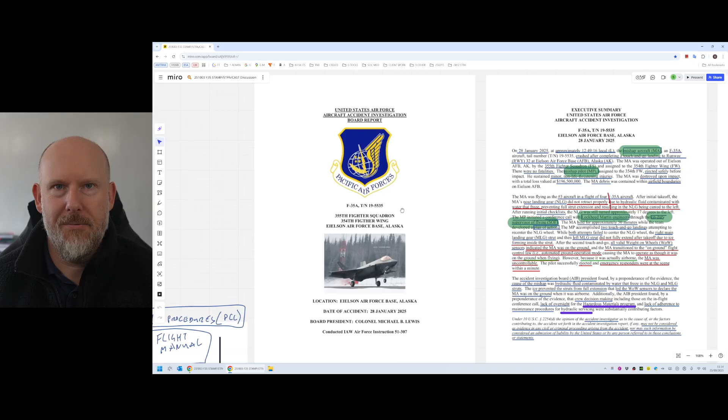In terms of where we got up to yesterday, we started going through the official investigation report, published relatively recently, and we managed to get all the way up to Section 5, maintenance. So what I intend to do for the next hour or so is continue through this investigation report, making notes, annotating things, and addressing any questions as we go. Let's get stuck in - Section 5 maintenance, that's where we got up to.

There we are, maintenance. This shows a crash site overview - I think that should be big enough on your screen. Yeah, it looks like it. Fantastic. So we've got pilot recovery chute there, ejection seat, impact site, taxiway Sierra, and then of course the flight line with all the aircraft over here.

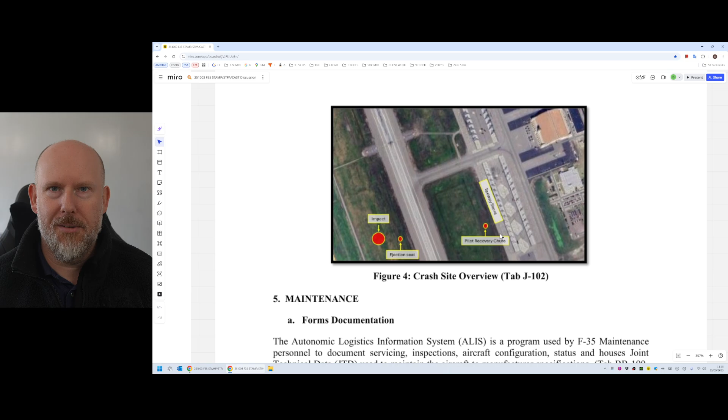That huge cost - $196.5 million. If things had just been slightly different, they could have had more casualties and more damage and destruction. So whilst it lost an aircraft, this was a near miss, a real lucky situation. I think they got off quite light, and it suggests there's some potential serious issues with the control structure, which we'll identify as we go through this.

So maintenance then, Section 5. Forms and documentation - the Autonomic Logistics Information System, here we go. This is interesting - the Autonomic Logistics Information System. That might be a candidate for inclusion in our control structure model, so we'll have to keep our eyes open for that and have a think about it.

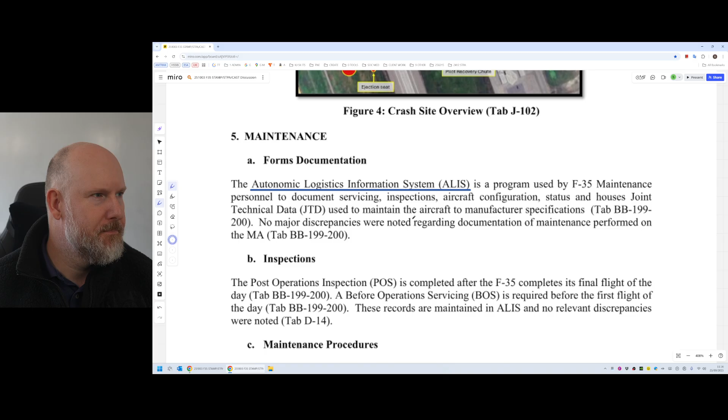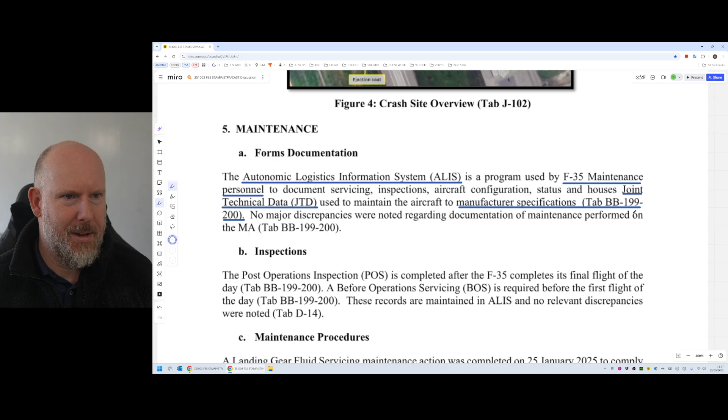Fantastic, thank you. So ALIS is a program used by F35 maintenance personnel to document servicing, inspections, aircraft configuration status, and houses joint technical data. So F35 maintenance personnel will certainly be in our control structure model - used to maintain the aircraft to manufacturer specifications. No major discrepancies were noted regarding documentation of maintenance performed on the mishap aircraft.

Okay, great - inspections. The post-inspection report: post-operation inspection is completed after the F-35 completes its final flight of the day. Before operations service, also AF and BF in traditional speak - before flight and after flight - is required before the first flight of the day. These records are maintained in ALIS and no other relevant discrepancies were noted.

Okay, so I'm just thinking, is it worth me now making that system explicit in the control structure? Or should we keep reading and come back to it? I think that's what we should do.

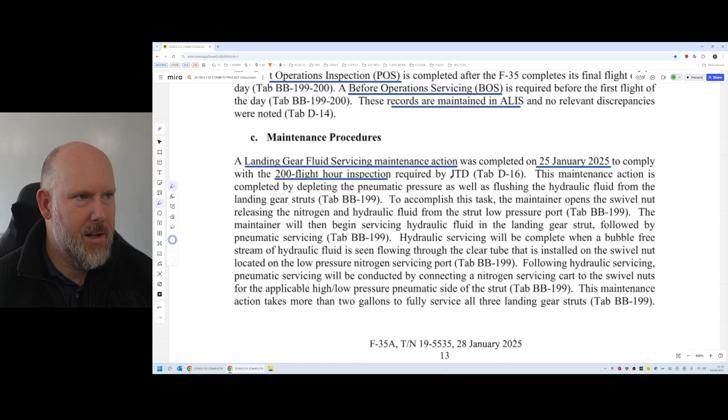So maintenance procedures then. A landing gear fluid servicing maintenance action was completed on the 25th of January 2025 to comply with the 200 flight hour inspection required by the JTD, the Joint Technical Data.

This maintenance action is completed by depleting the pneumatic pressure as well as flushing the hydraulic fluid from the landing gear struts. To accomplish this task, the maintainer opens the swivel nut, releasing the nitrogen and hydraulic fluid from the strut low pressure port. The maintainer will then begin servicing hydraulic fluid in the landing gear strut, followed by pneumatic servicing.

Hydraulic servicing will be complete when a bubble-free stream of hydraulic fluid is seen flowing through the clear tube that is installed on the swivel nut located on the low pressure nitrogen servicing port.

Following hydraulic servicing, pneumatic servicing will be conducted by connecting a nitrogen service cart to the swivel nuts for the applicable high-low pressure pneumatic side of the strut. This maintenance action takes more than 2 gallons to fully service all 3 landing gear struts.

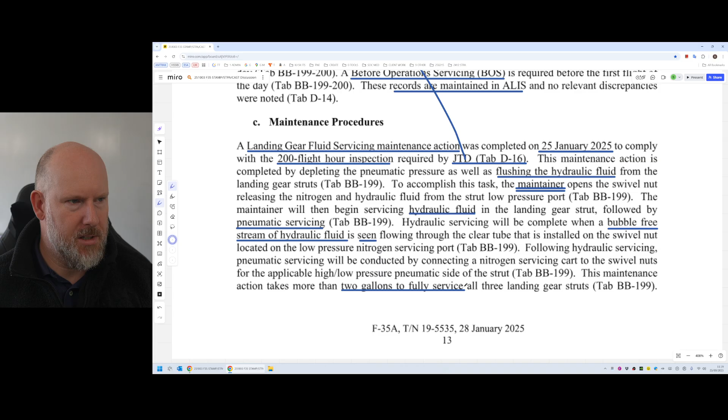Fantastic. 3 days prior to the mishap, so that's some time information that might be relevant. 3 days prior. I can't spell today. There we go. I can't speak, can't spell or write.

Anyway, the maintenance team used no more than 2 gallons of hydraulic fluid to service the aircraft because the team only used 1 hand cart and they did not refill it during the procedure. It was determined that water was already in the struts prior to the servicing because of the amount of hydraulic fluid correctly serviced.

So they used no more than 2 gallons.

Maintenance personnel and supervision, both maintainers - so there were 2 maintainers - assigned to the 355th Fighter...

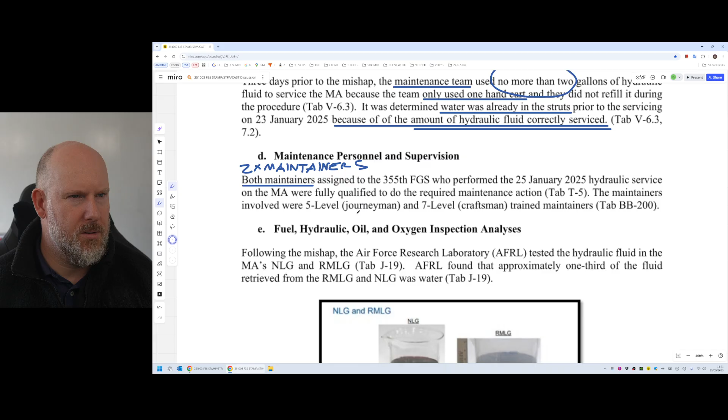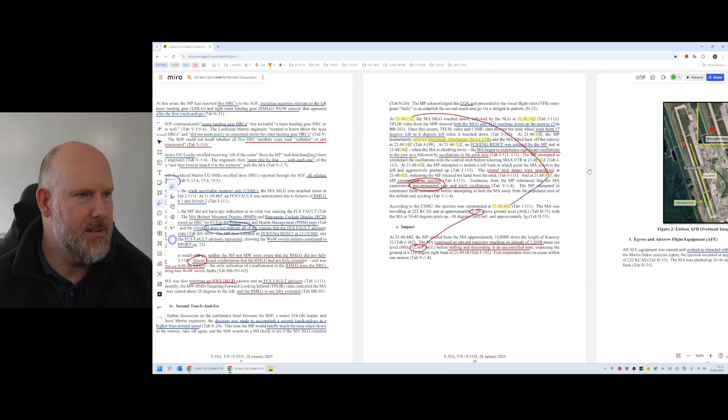What was FGS? Oh, that's the ground squadron, isn't it? The FGS, that's the maintenance ground squadron. Where's FGS in there? Come on, FGS. FGS is missing. Found one. There we go. I think it's mentioned earlier on, isn't it? Let's have a look. It was mentioned earlier on somewhere. Is it mentioned there? No, it's not. So FGS, what the heck is FGS? Flight Ground Squadron, something like... Yeah, it is. No, hang on, that's the one we've just been looking at.

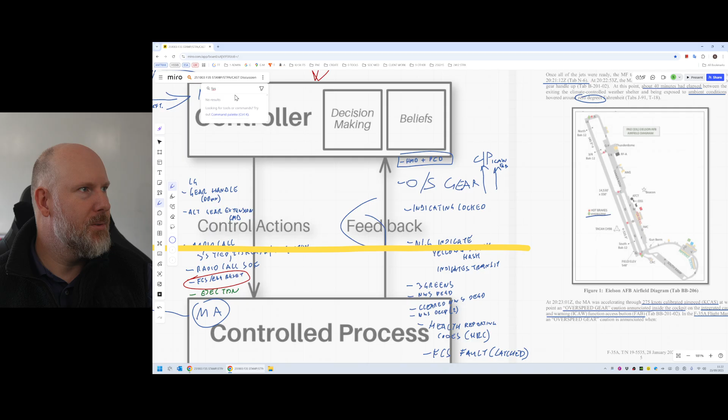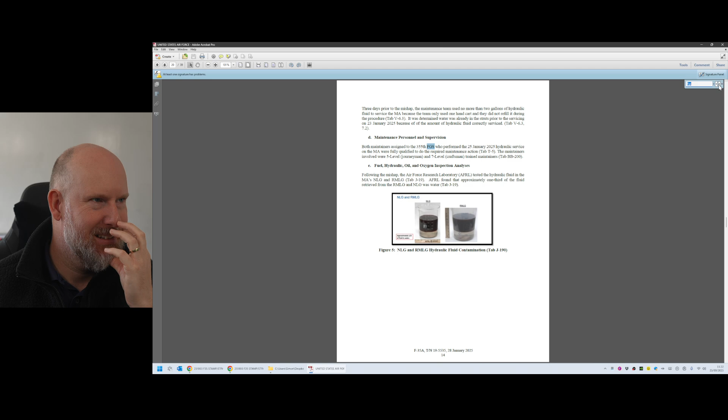So what's FGS then? Anybody know in the chat what Foxtrot Golf Sierra is? FGS, I'm sure we touched on it yesterday. I seem to remember something. FGS, come on. You know what? I could just try the search function, couldn't I? But of course it doesn't work. That's helpful. Right, that's not helpful at all, is it? Let's get the official investigation report open and I'll search for FGS in there. There we go, FGS. Come on, where does it describe what it is? I'm sure it said it. It doesn't say what is FGS? Come on. Is it the ground squadron or something? Ground squad, come on, what is it? Ground, ground, ground, ground, ground, background. This is weird, I could have sworn. That's really strange. Okay, I'm going to have to search on Google. What does USAF FGS, what is it?

Fighter Generation Squadron, apparently. Okay, yeah, which is responsible - you're not seeing this, are you? There you go. So, Fighter Generation Squadron, which is responsible for the inspection, general, and organisational maintenance of specific type of aircraft. Okay, so that's what it is. Right, there we go, fantastic. So now we know what it is.

Let's go back to where we were. Going too fast. There we go, sorry, FGS. So let's paste that in there so we don't forget. FGS. Oh, here we go, Milan. Hi Milan, great to see you mate. FGS sometimes means fuel gas supply or flying ground service. That's thanks for that, that's really helpful. They're different acronyms to what I'm used to. That's what it is, that's my excuse and I'm going to stick to it.

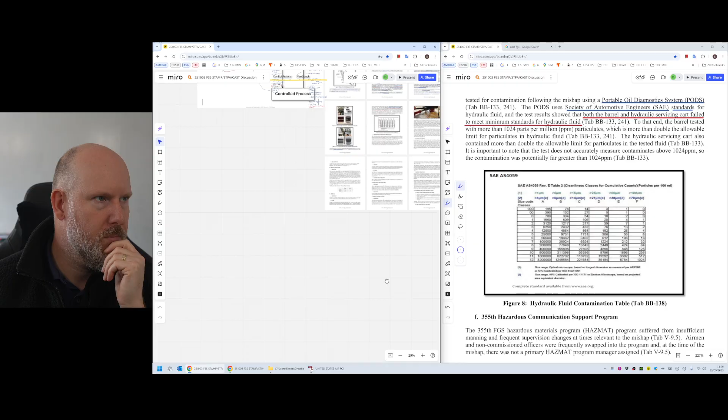So let's just duplicate this. Let's get rid of all the scribbles, if I can remember how to do it. There we go, delete. So that should be nice and clean now. So let's think about it like that then.

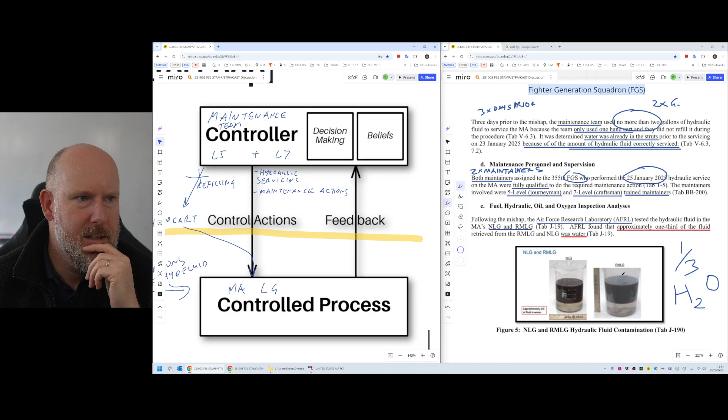So the mishap - they found a third of water in the hydraulic fluid, which is quite incredible. The hydraulics fluid was sourced from a barrel. So if I just move this over here a bit, so you can see, 2 gallons of hydraulic fluid that came from some barrels, a barrel.

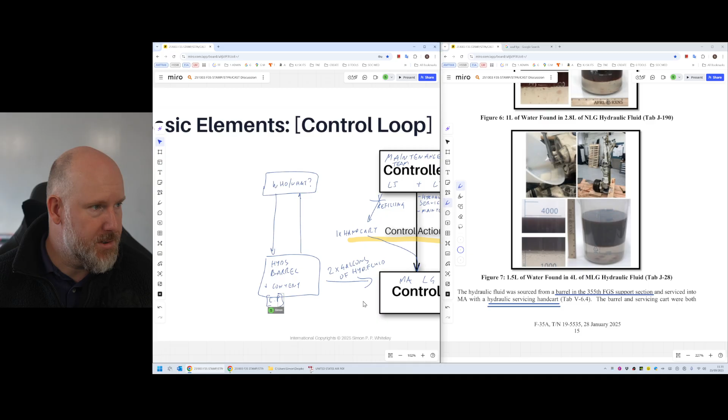I'm drawing a box around it, not because it's a controller, but because it's a control process for somebody. So who or what is in control of that hydraulics barrel and the content? That is a controlled process, that's what CP means. Let me zoom in a bit so you can see it. So who or what is involved in that hydraulics barrel and the content of it?

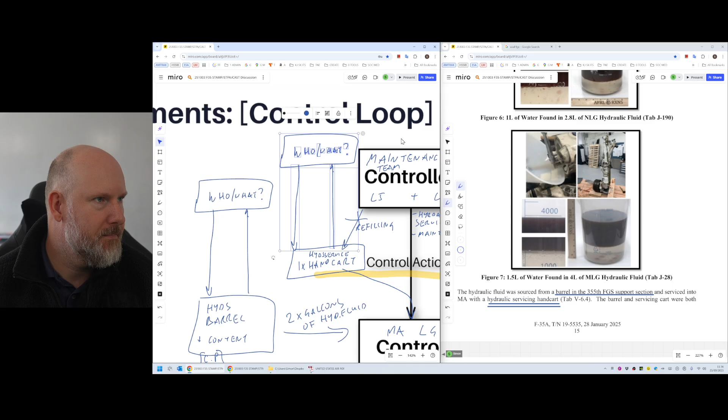It mentions there that they use the hydraulic servicing cart, so I'm presuming that's what this is here, the hand cart. So let's label it: hydraulic servicing hand cart. Let's make that into a controller, and let's steal that bit, duplicate it. So who or what is involved in looking after the hydraulic hand cart? There you go - so we've got potentially 3 control loops there to consider as part of our analysis.

The barrel and the servicing cart were both tested for contamination following the mishap using the PODS. The PODS uses standards for hydraulic fluid, and the test showed that both the barrel and the servicing cart failed to meet minimum standards for hydraulic fluid. So both of these - oh no, not that one, this one - both of these are not in a good state.

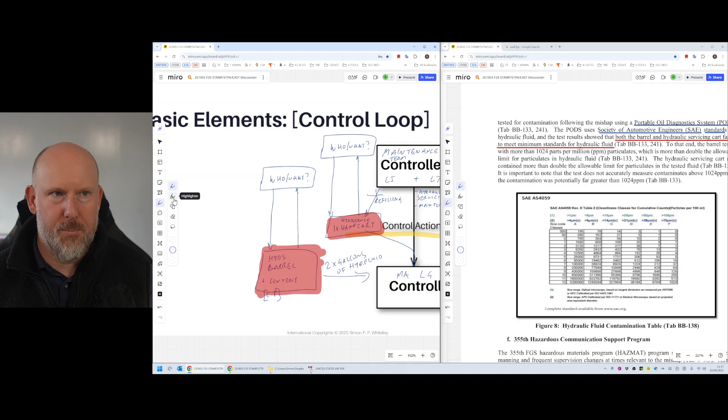And I'm just busy colouring in. There we go, I should have used boxes instead of drawing it. But yeah, so we know that those 2 control processes, there's something not right with those. So the exploration of the investigation should essentially be: let's have a look at these control actions here and here. So why were they inadequate in making sure that the hydraulic fluid was not contaminated? Because that's really what we're focusing on here - the contamination of the fluid. To that end, the barrel tested with more than 1,024 parts per million particulates.

Why is it not - oh, it's because I've got two screens open at once, that's why, I'm trying to be too smart, that's what's going on. Anyway, which is more than double the allowable limit for particulates in hydraulic fluid. The hydraulic servicing cart also contained more than double the allowable limit in the tested fluid. It's important to note that the test does not accurately measure contaminants above 1,024 parts per million, so the contamination was potentially far greater than 1,024.

Okay, so that's not good, that's not good at all. So let's explore this use of PODS that we're talking about here.

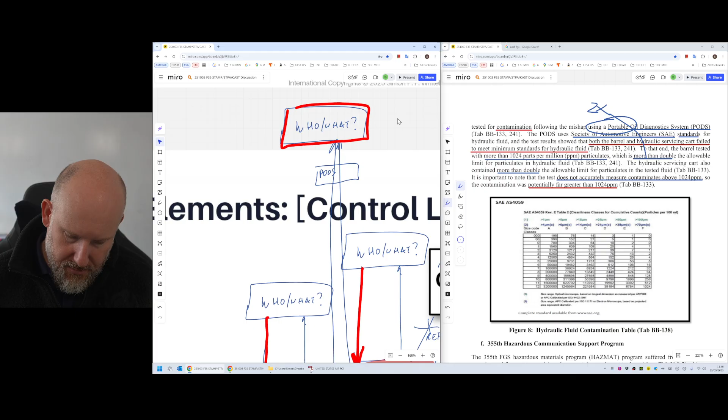So this one here and this one here, the start cart - is that responsibility, that explicit responsibility, actually allocated to whoever these are? I don't know who they are at this stage. And are they even the same controller? They could be the same controller. We don't know that at this stage.

But that's what I'm trying to show you here - by thinking about things through the lens of control loops, jigsaw pieces, it allows you to think, oh, actually, we've got this physical situation or we've got this control action. Who or what is involved in that control structure? And this is not about trying to find people to blame. It's trying to understand, uncover, what are the jigsaw pieces? What is the jigsaw puzzle that we're actually involved in, in this particular situation?

And so if we were able to interview these two, whoever those people are - presuming it's not AI and anything crazy like that - who are those people? Are they the same people? What are their responsibilities? If they provided the control actions or didn't collect the feedback, why did it make sense? What's going on there? So I'm jumping ahead a little bit there, but I hope that makes sense, the logic behind the thought process.

Okay, so going back to this, it's potentially more than 1024. Okay, that's some hydraulic fluid contamination table. Yeah, okay, I'm not really too fussed about the specifics of that.

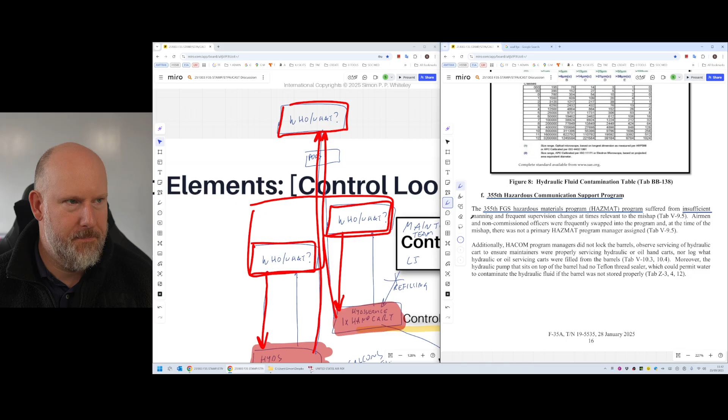355th Hazardous Communication Support Program. Okay, so that might be a controller of some description. The 355th Hazardous Materials Program, so HAZMAT program, suffered from insufficient manning. Oh, here we go. Insufficient manning and frequent supervision changes at times relevant to the mishap.

Okay, so I'm presuming then that this red box I've drawn, this is what they would call the hazardous materials program, I'm assuming. And this is one of the advantages with CAST - when you identify a candidate controller, the first question... in fact, I'll just zoom out and show you. The first question is, for this particular controller, what are their safety-related roles and responsibilities and safety requirements constraints?

If it is making sure that the hydraulic fluid is below a certain limit of contamination, then who has that responsibility? Why was it not fulfilled? And if, as this says here, there were frequent insufficient manning levels and frequent supervision changes, that would explain why it's not been done.

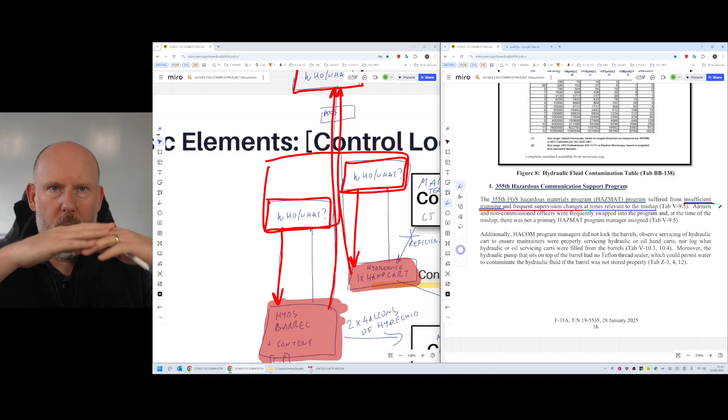But who's responsible for making sure - who is the person who decides on manning levels, or what department, and then who decides about supervision changes? Who is that layer above these ones? There's another layer there. Who's involved in that? Why did it make sense for them to make those decisions?

Because there may be some genuine... we're not here to point fingers and blame people, or question people's competence. It's not about that. It's about understanding what are the facts, whether it's related to competency or not. What was the decision making? What were the beliefs? Why did it make sense?

So airmen and non-commissioned officers were frequently swapped into the program, and at the time of the mishap, there was not a primary program manager assigned. Okay, there we go. That's interesting.

So let's stretch this around a bit. Let's move this down a bit like that. So we've got a question there about... let's steal that bit there, not that, duplicate, let's put it over there. Let's get rid of all of that and the red bits. There we go. So there's a question there over who or what. And maybe I'll stretch it a bit more. There we go, put it down there. Okay, so who or what?

So we've got the... you know what I might do? I might use a box. Where is it? There we go. Might make it look pretty if I do it like this. So the 355th Hazardous Comms Support Program should have a program manager, so let's put that there, but there wasn't one.

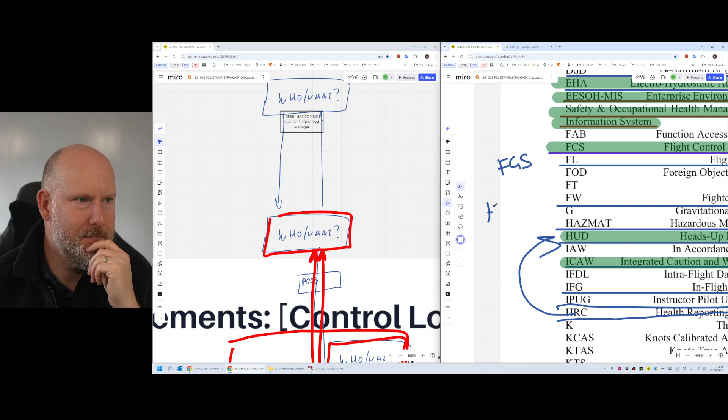Okay. Additionally, HACOM... oh, hazardous communication, I'm assuming. Let's just have a look at the acronym list. HACOM, HHH, missing. There we go. HACOM. It needs to go in there somewhere, and that needs to go in there somewhere. Okay, where were we? There we go.

Program managers did not lock the barrels. Okay, so if we're talking about the barrels down here, that particular single line there - did not lock the barrels. That's related to this control action here. And then we've got... so that's a potential contributory control action, if we want to get technical.

Observe servicing of hydraulic cart to ensure maintainers were properly servicing hydraulic or oil hand carts, nor log. So they did not observe servicing, so that's another contributory control action.

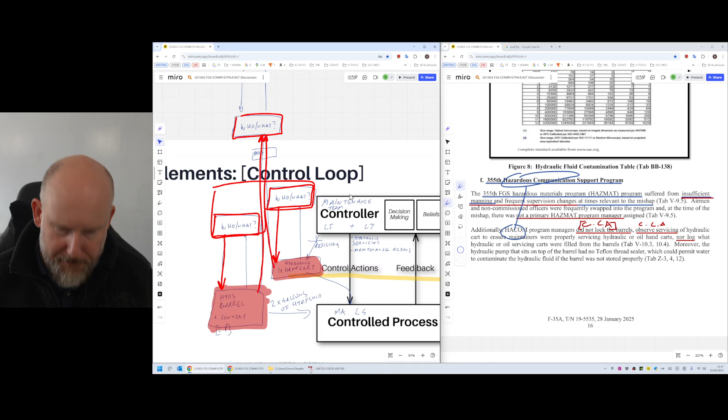And I suppose that's actually related to, let me use my pen over here. That's probably a feedback path. Why is my pen not working? Come on.

Yeah, you can see my screen, so let's just move that there. So there's a potential missing feedback loop from there or there. It's not really clear from the description, but that's about observing the servicing of the hydraulic cart. Oh, right, okay, so that could be this control action here, or it could be another, or it could be this one we've already highlighted here like that.

Could be that one that this is referring to. And there wasn't a log of what hydraulic or oil servicing carts were filled from what barrels. So there was no log. So in terms of, if you imagine the, let's have a look, let's choose a different colour.

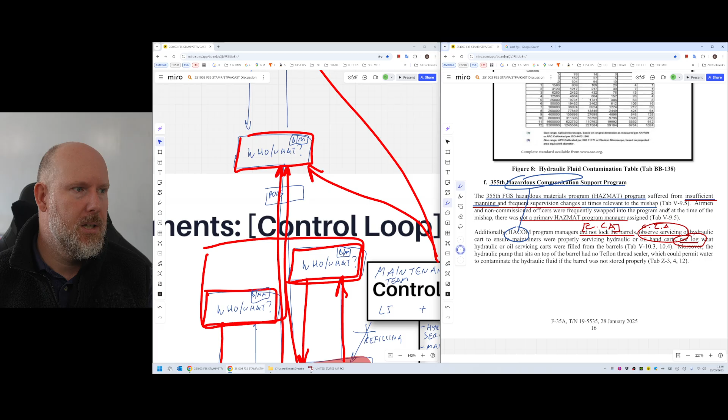If you imagine the beliefs or mental model of these people, whoever they are, or whoever this person might be, beliefs, mental models, the log, whilst the log is not a controller itself, it is a representation of the process model, which is a representation of the state of, I'm going to make it even, yeah, it's a representation of the state of these two. So if there's no log, then how do these individuals or how does the organisation know and be able to manage and maintain and control that controlled process?

Well, they can't, as we're sort of alluding to here. So I'm just going to quickly add that up here. So what's it called? It's called a log. So let's just make that explicit, because the log is important. It is really, it's not just paperwork, everybody. These, you know, yes, it's paperwork or digital, but it is critical information.

And this is one of the questions. In fact, this is a good topic to talk about. So I mentioned yesterday, I'm doing some work on electronic prescribing medicine administration investigation. And there's always a question about whether it's a medical device or not. And in the UK, in Europe, there are regulations on how to classify medical devices. You know, certain functions mean it's definitely a medical device. And if it is, it has to be managed in a certain way, and if it's not managed in that more robust fashion.

But the question is not whether it's a medical device or not in that context. It is, what purpose does that record, the log in this case, what purpose does it serve in a control structure? And if it's not provided, it's lost or denied, or if it's too late, or it's provided out of sequence, or it's not consulted, does that have an impact on the overall control structure? Does that influence, perhaps dangerously, the behaviour of certain controllers?

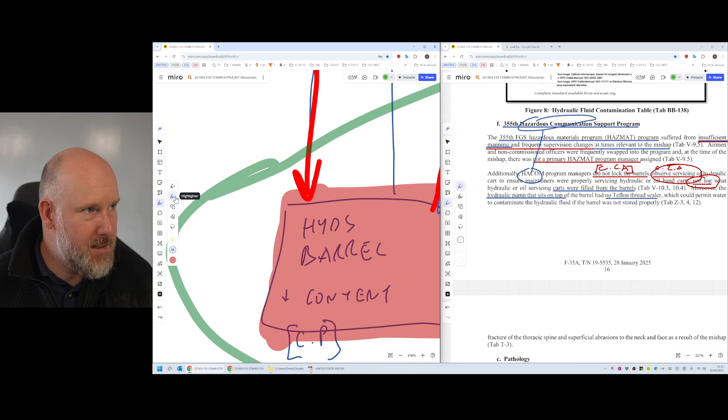Moreover, the hydraulic pump that sits on top of the barrel had no Teflon thread sealer. So this is about the physical process here, and how, sorry, let me use my pen over here. There we go. So if this is the hydraulics barrel in the content, and you have a process to refill it, using, what's it called, using a hydraulic pump.

Okay, and that has no Teflon thread sealer, which could permit water to contaminate the hydraulic fluid if the barrel was not stored properly.

So this is where we'd focus from a physical process perspective. Well, was it supposed to have a Teflon thread sealer? If not, why not? What's the controller involved in that? Is it a design issue? Is it a maintenance issue? Is it a build issue? Did it come from the factory with this part missing? So is it a manufacturer issue? Is it a maintenance issue?

And then, of course, water getting in to contaminate the hydraulic fluid if the barrel was not stored properly. Okay, so again, that goes back to this controller. Who or what is involved in maintaining and storing the barrels? What decision making did they make? Was there a conscious decision to store it in a particular place which was not stored properly, whatever stored properly means? Do they know what criteria they need for proper storage? Because if they don't, that might explain it.

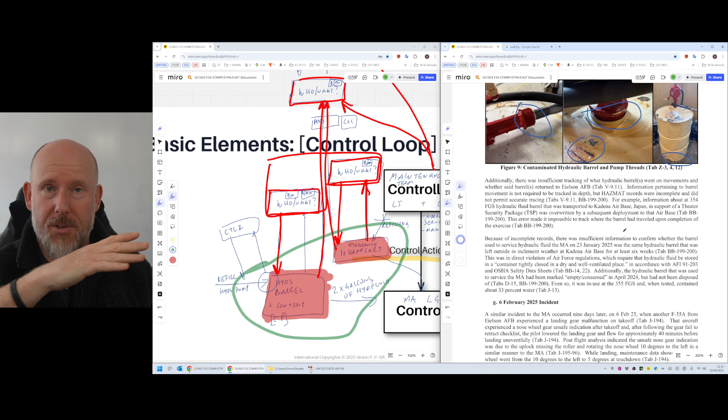There we go. Maybe they didn't have any. Maybe they didn't have any in stock because there's an issue with the supply chain for those things. And if that's the case, what does the supply chain control structure look like for that seal? I'm going a bit crazy here, I'm just trying to stretch your mind a bit.

Additionally, there was insufficient tracking of what hydraulic barrels went on movements and whether said barrels returned to Eielson. So there's a tracking aspect. So let's have a look.

Come on, wake up. That's it. So I put a log over here, look at the top, and there is an equivalent log needed for the barrels themselves. So status of the barrels, and then status of the maintenance and content of the handcart and the barrels themselves. And those two logs, this one up here and this one down here, they could be part of the same logging system, maybe. I don't know, I'm guessing. That might affect the way I model the control structure.

Because there was that mention of that ALIS thing earlier on. Let's have a look, where is it? ALIS, where are you? There we go, ALIS. So is ALIS relevant to this? Is that the log that they're supposed to use? Is that the log that's supposed to track and manage the... so it's about servicing, inspections, aircraft configuration, statuses.

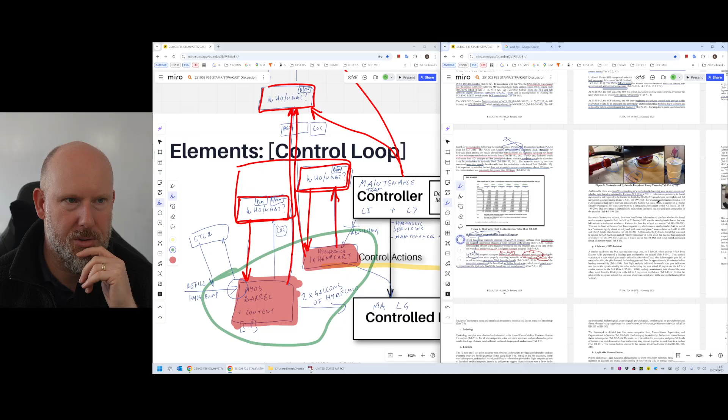Anyway, information pertaining to barrel movement is not required to be tracked in depth, but hazmat records were incomplete and did not permit accurate tracing. For example, information about the 354 FGS hydraulic fluid barrel that was transported to Kadena in support of a theatre security package was overwritten by a subsequent deployment to that airbase. This error made it impossible to track where the barrel had travelled upon completion of the exercise.

Okay. Yeah, okay, that's interesting. Because of incomplete records, there was insufficient information to confirm whether the barrel used to service hydraulic fluid on the 23rd of January was the same barrel that was left outside in inclement weather. Ah, okay.

For at least 6 weeks this was in direct violation of it. So, because of incomplete records, there was insufficient information to confirm whether the barrel used to service hydraulic fluid was the same hydraulic barrel that was left outside in inclement weather.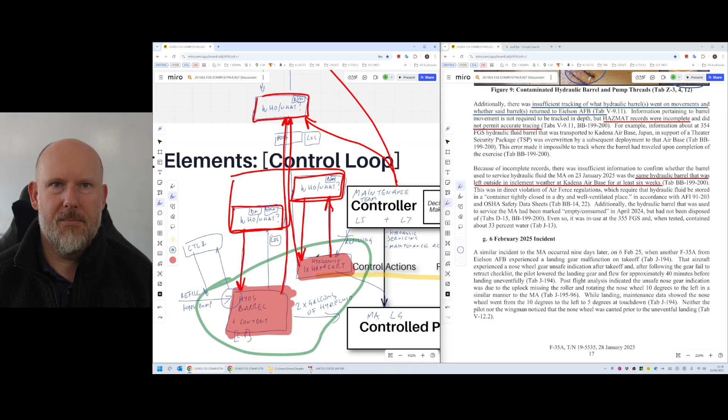In terms of this control structure, I was thinking it was constrained to Eielson Air Force Base. But what this is describing is actually this barrel was under the control of somebody else in a completely different country, in Japan. So that's interesting.

This was in direct violation of Air Force regulations, which would be higher up in the control structure. I'll just scribble those on there to add a bit of detail. Bear with me a second. Air Force regulations. So the question is, how does that get down to the person filling the barrels, or to the persons involved in maintaining them, looking after those barrels, moving them around, and the logistics, which require the hydraulic fluid to be stored in a container.

So the fluid is to be stored in a container, tightly closed, in a dry and well ventilated place, because it's quite nasty stuff. You don't want to be breathing it in, in accordance with AFI 91203 and OSHA safety data sheets.

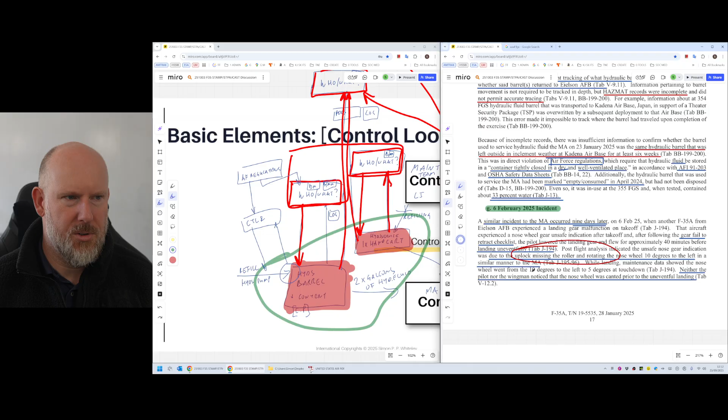So the question is, is it that 5 degrees is survivable and doesn't flip the aircraft upside down? And if it had stuck at 10 degrees, would it have flipped the aircraft upside down, but the pilot would not have realised? These are things you wouldn't expect the pilot and wingman to be checking - the gear after takeoff before retracting it, and then making sure it's clear after retraction every time. But then I'm not a fighter jet pilot, so they may do a lot more checks than I anticipate.

It's an aircraft, it's not a car, Simon, you know. There's a lot of things that you'd have to check that you wouldn't do on a car.

Anyway, a post-flight test was done on this aircraft by first towing it into a climate-controlled shelter. What's 70 degrees? 70 degrees American into English, so 21. So it's quite a warm 21 degrees, quite balmy, t-shirt weather.

And recording the nitrogen pressures on the landing gear shock struts, the aircraft was then towed outside where temperatures remained below 15. So 15 is -9, so that's still cold. Still cold.

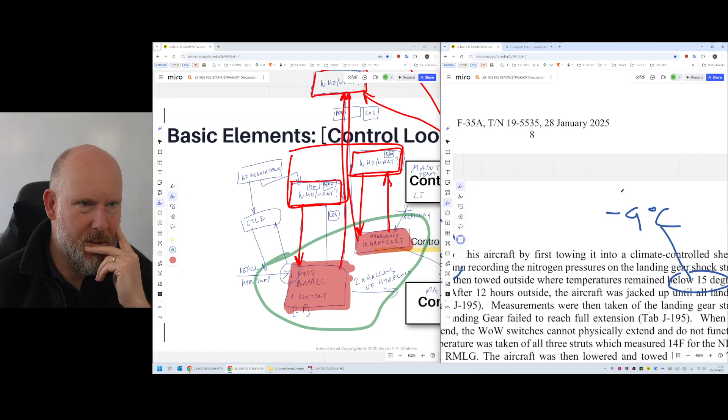But not as cold as the previous accident. I can't remember what that was. That was like -7 or 11 or something. Where is it? Where's the temperature? I'm sure I scribbled it down. There it is. No, yeah, there we go, -17. So it's -17. So it was not as cold as the previous one.

After 12 hours outside, the aircraft was jacked up until all landing gear cleared the ground. Measures were then taken of the landing gear struts.

The aircraft's landing gear failed to reach full extension when the main landing gear struts failed to fully extend. The WOW switches cannot physically extend and do not function properly. Oh dear. Temperature was taken of all three struts, which measured 14 degrees.

7 degrees to the left main, the right main. The aircraft - oh, that's interesting. So the main gears were warmer than the nose landing gear.

The aircraft was then lowered and towed back into the 70 degree climate-controlled hangar, and sat for 12 hours. All three landing gear struts were then drained of all fluid into mason jars. The nose landing gear and left main landing gear had a significant amount of water present, while the right main landing gear appeared to be all hydraulic fluid.

So for this particular aircraft, does it give a tail number? Yeah, it doesn't say which other aircraft it was. So it's obviously a different aircraft because the first one's been smashed up.

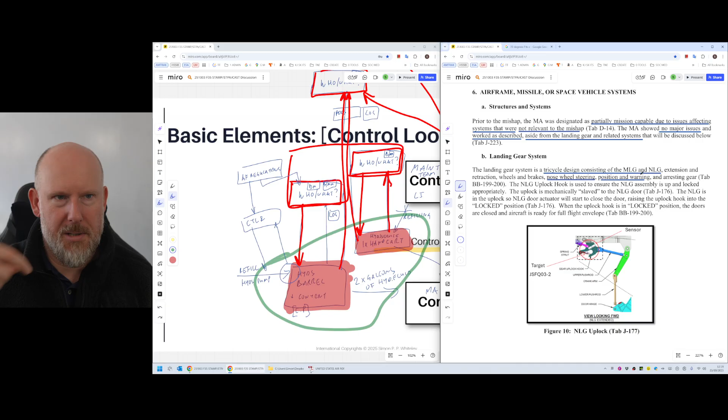So the landing gear system is a tricycle design consisting of the main landing gear and the nose landing gear, extension and retraction, wheels and brakes, nose wheel steering, position and warning, and arresting gear. So that's a hook typically at the back. The nose landing gear up-lock hook is used to ensure the landing gear assembly is up and locked appropriately.

The up-lock is mechanically slaved to the nose landing gear door. When the nose landing gear is in the up-lock, the nose landing gear door actuator will start to close the door, raising the up-lock hook into the locked position. When the up-lock hook is in locked position, the doors are closed and the aircraft is ready for full flight envelope.

Oh, sensor, there we go, that's important. And then the target for the sensor. Spring strut, gear up-lock hook, upper push rod, crank arm, lower push rod, door hinge.

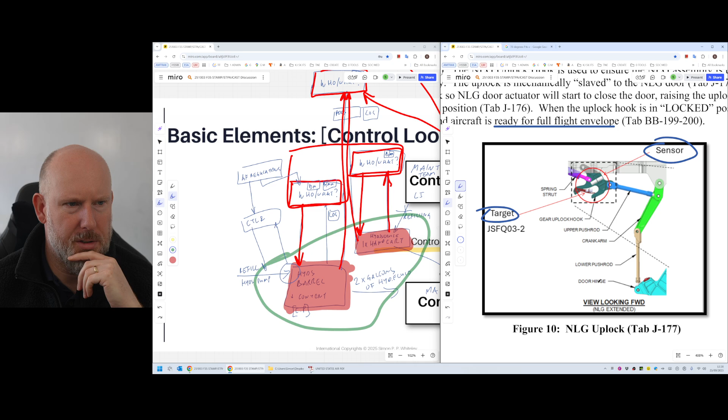Fantastic. Okay, what's this one then? So this is the nose landing gear lower shock strut. We've got lower centering cam, possible ice build-up in the area, upper centering cam, upper shock strut. The nose landing gear centering cams are used to ensure proper centering of the nose landing gear.

One of the cams is mounted at the top of the landing gear strut and the other is mounted at the bottom. At the beginning of the mishap flight, the nose landing gear didn't fully extend due to ice build-up within the strut. The ice build-up was the combination of significant water contamination in hydraulic fluid used to service the struts and ambient freezing condition temperatures around Eielson. The lack of full extension caused a misalignment that prevented the nose landing gear up-lock hook from catching the nose landing gear up-lock roller, causing damage to the metal adjacent to the roller.

Ah, okay, there we go, look. So we've got some damage. Okay. Additionally, significant pitting was identified within the landing gear piston that, while caused by contamination to the hydraulic fluid, did not affect the landing gear function. Okay, so that's interesting.

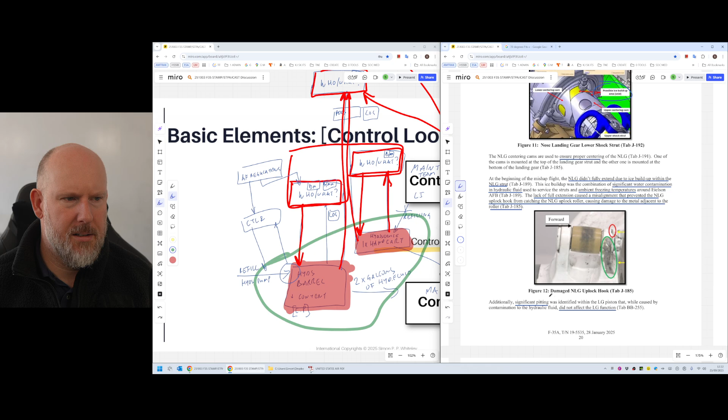In terms of servicing, so this is—I just move this over here. In terms of feedback there, you've got the pitting within the piston.

So I'm presuming that the maintenance or servicing procedure will look for those signs, because if it's left to get worse, you'll end up with potential cracks and perhaps pressure release or breakup of the piston itself, which would be bad. I'd imagine that takes a while to happen, so there might be a dormancy period. I'm assuming that. I'm sure there's people out there that know everything about landing gear and have done the failure modes and effects analysis for these components, and understand the physics of failure associated with ice and water contamination.

Okay, so some nice pictures. We've got the nose landing gear, the main landing gear, and the WOW sensors, weight on wheel sensors.

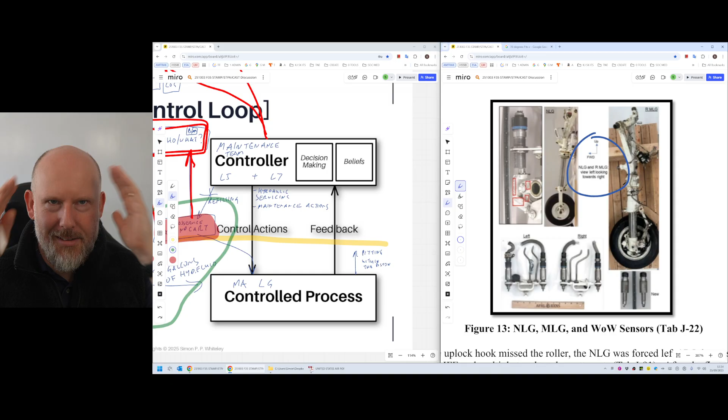I'm impressed with this. One of the things I really like, you can tell that whoever's been involved in the investigation has got a real good sense of attention to detail and also a healthy respect for the audience when they include descriptions like that to help you visualize in your mind, tell a story about what you're actually looking at. I really appreciate that, whoever wrote the report. Thank you.

After the nose landing gear uplock hook missed the roller, the nose landing gear was forced left 17.5 degrees, leading to the in-flight emergency and multiple touch and go attempts. After the first touch and go, the right main landing gear and nose landing gear WOW sensors showed weight on wheels, despite the aircraft being airborne. This was because the aforementioned ice buildup prevented the struts from fully extending or retracting. On the last touch and go, the nose landing gear wheel went from 17.5 degrees to 6 degrees after it was allowed to briefly touch the runway.

So just quickly, just to emphasize this previous accident that occurred. This one here, similar accident. So they said that it went down to 5 degrees at touchdown, whereas this one was at 6 degrees at touchdown.

Is that suggesting, and please entertain the idea, is that suggesting that with the accident aircraft, the mishap aircraft, if they'd have tried to land with 6 degrees after this touch and go, the aircraft might have survived, because we've got circumstantial evidence here that this other aircraft landed with 5 degrees at touchdown. So maybe 6 degrees, maybe they get away with it. I don't know how hairy 5 degrees was. But of course, that's an academic question because, after the aircraft took off again with 6 degrees, we ended up in an uncontrolled situation. So, yeah, a bit of an academic question now, I think.

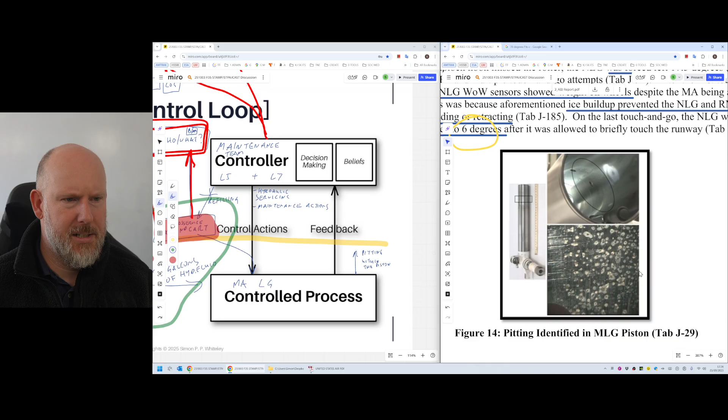Pitting identified... Oh, that looks quite bad, actually. That looks quite bad. Pitting identified in main landing gear position, piston, should I say. As discussed below, the inability of the strut to fully extend and retract impacted the proper functioning of the WOW sensors and the flight control law on the mishap aircraft. According to Lockheed Martin, if a main landing gear strut fails to fully extend to the predetermined length, then the WOW sensors cannot extend and will report weight on wheels.

So in terms of thinking about the control loop, I'll just quickly jump back to this one here. So have we put WOW sensors on there? No, we've not, because this is the pilot and this is the aircraft. Okay, so this yellow line just represents the abstraction between the aircraft as a controlled process and the pilot.

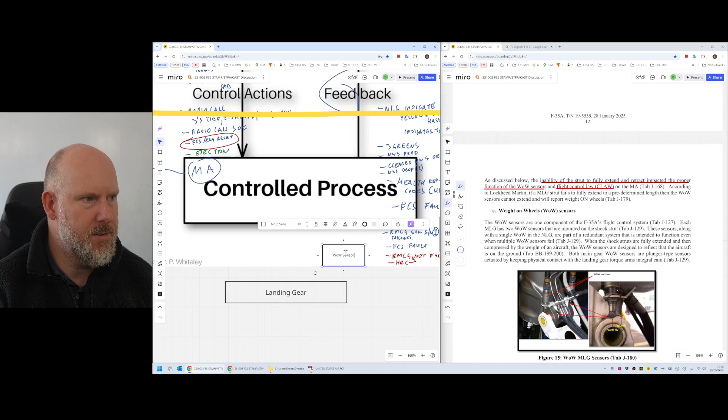What I might elect to do is add, let's stick another controller in here. Let's have landing gear. I can't spell. Landing gear. Excuse me, there we go. And then let's make that text a bit bigger. There we go, make the box a bit bigger. That's it. And then, oh no, I didn't mean to do that. And then this can be the WOW sensors. WOW sensors. So that box represents sensors. That doesn't represent a controller, that represents sensors. Just to emphasize that point.

And of course, we want an arrow, so let's get an arrow that goes from there to there. Let's make it a straight one. There we go. Oh, no, I didn't mean to do that. There we go. So we've got WOW sensors. So the WOW sensors provide feedback to, in fact, actually, let's just do this as well. So the aircraft controls its landing gear to command it up and down. The WOW sensors provide information back to the aircraft, and the aircraft decides what state it's in.

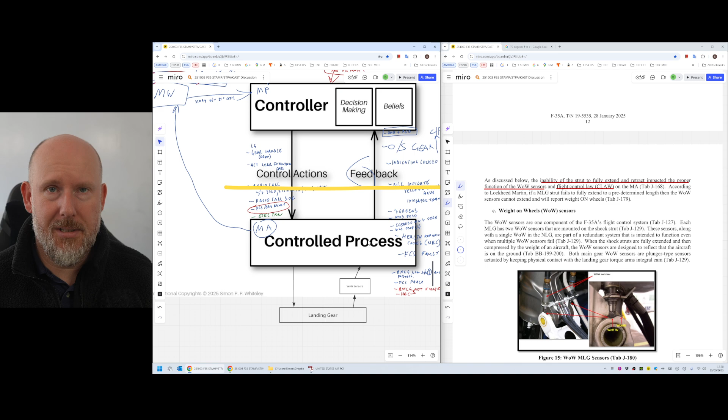So let's have a look at this then. Yeah, that's a really important point just there.

There we go, I'm just going to grab a drink. Just bear with me a second.

There we are, back again. Right, so the weight on wheels sensors. Let me just zoom in on there so you can see it a bit better.

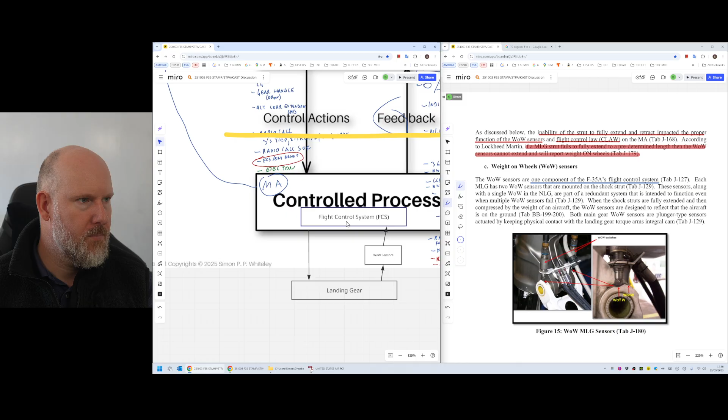So the weight on wheels sensors are one component of the F35's flight control system. What I'm going to do is make a box that says flight control system, FCS presumably, and that goes into the FCS. I'll just move it down a bit. There we go, hope that makes sense.

Each main landing gear has 2 wow sensors. So if I want to get exciting, I could put MLG wow sensor times 2, and each - so left and right, times 2. There we go, so there's 4. And then what else is there?

They're mounted on the shock strut. And then these sensors, along with a single wow for the nose landing gear - nose landing gear wow sensor times 1. So we've got 5 sensors. If you've got a fault tree analysis, it's going to look fantastic because you've got 5 sensors, everybody.

So 2 wow sensors and a single wow are part of a redundant system, everybody. It's redundant - intended to function even when multiple sensors fail. But we're not talking about sensor failures here, are we? Or are we?

Good question. When the shock struts are fully extended and then compressed by the weight of the aircraft, the wow sensors are designed to reflect that the aircraft is on the ground. Both main gear wow sensors are plunger type sensors, actuated by keeping physical contact with the landing gear torque arm's integral cam. So let's have a look at this.

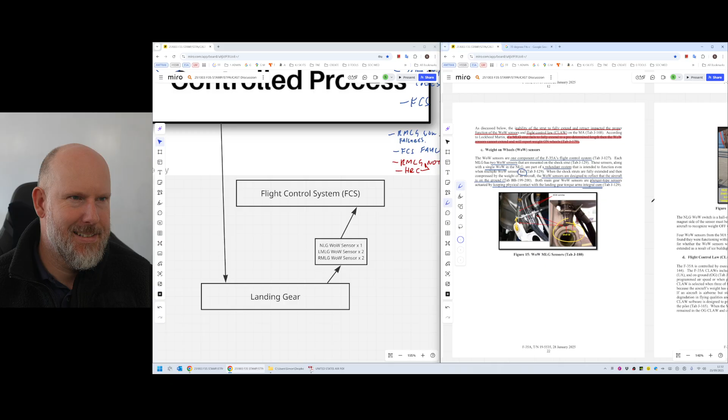Interesting. I wonder if this aircraft's got a radar altimeter or accelerometers. Anyway, I'm guessing on the aircraft design - I shouldn't be.

So weight on wheels at the nose landing gear, switch, Hall effect - oh, it's a Hall effect sensor. Fantastic, everyone loves a Hall effect sensor. Is not aligned, weight on wheels.

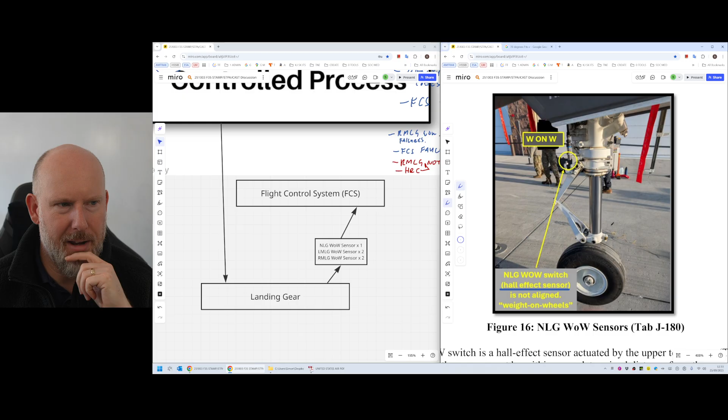So this is a diverse type of sensor compared to the other ones. And if I remember correctly, they're not that reliable. I could be wrong - correct me in the comments if you know about Hall effect sensors.

In fact, let me just - no, I don't need to add that detail. I don't need that level of detail, do I? No, I'll leave it. The nose landing gear switch - it's a Hall effect sensor actuated by the upper torque arm.

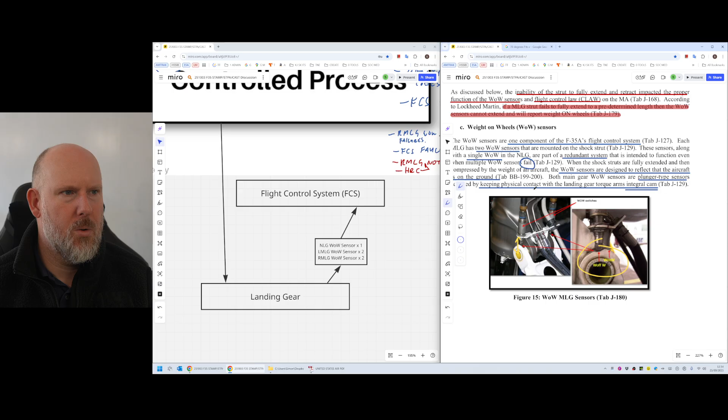The magnet side of the sensor must be within a predetermined distance from the sensor for the aircraft to recognize weight off wheels. So I'm presuming this is weight on wheels because it's compressed, whereas this one is weight off wheels. So this is off and this is on.

Weight on wheels, and then this one is weight off wheels. You might be thinking, Simon, why is that relevant? Well, it is a different functional logic.

If you've got a sensor that's designed to provide feedback about weight being on wheels, and you have a different diverse sensor to signify weight off wheels, the way those two bits of logic actually find their way into the control system is really important.

What's the word? It's not geometry - there's another word, I can't think what it is - but essentially you need to make sure that logically the people involved in the aircraft design, or the design of this system, and the way they do the safety assessment - we're all humans, we're all prone to making mistakes and misunderstanding or misbelieving things and acting in ways that are not appropriate. We're all humans, part of the design process.

Something as simple as the logic between off and on - that logic must be translated into the analysis, into the design, into the requirement spec. It must come out the other side and influence the way we do verification and validation and testing, and then even down to the design of the way they build the thing and maintain the thing, and how they do validation tests, verification tests, once the thing has been maintained.

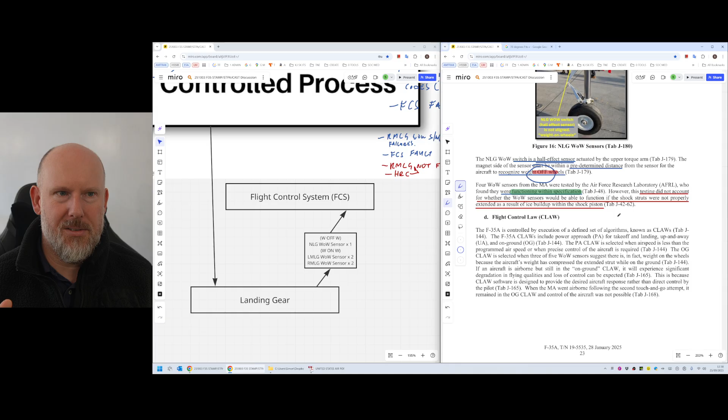But of course, this is the same for every aircraft, all aircraft, anything with landing gear struts like this one and that arrangement of sensors. Anyway, I'm digressing there. Let's have a quick drink.

Now let's talk about the flight control law, or the CLAW. The F-35A is controlled by execution of a defined set of algorithms known as CLAWs.

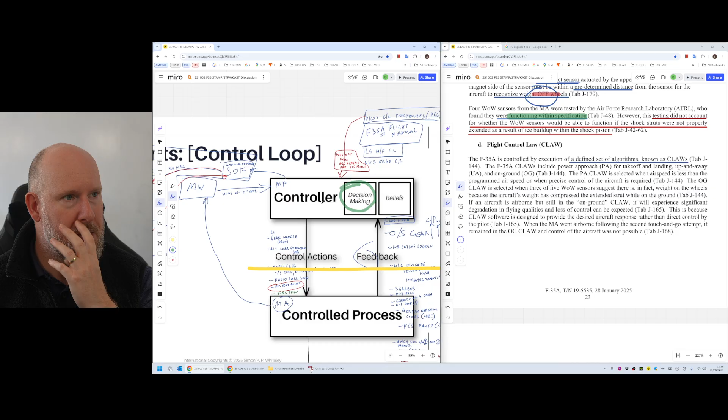So if we look back at our picture, whilst this shows decision making - if you're familiar with the STAMP literature, this represents the control algorithms, the decision making for that controller. So if we're talking about the flight control system, the CLAWs are effectively the decision making control algorithms for this particular controller. So this is the CLAWs. Let's make that box a bit smaller, make the text a bit smaller. Let's make this box a bit bigger, put the writing over there. That's fine.

So we've got flight control system: decision making, control algorithm - CLAWs - and logically we also have what's called the process model, or beliefs process model. I put a B there to remind you it's beliefs, and a DM there to remind you it's control decision making, and then control algorithms, process model, beliefs. So the sensory feedback logically goes into updating the process model for the flight control system - essentially telling it, hey, we're still on the ground, or we are on the ground, so behave accordingly. Then it's up to the control algorithm, the decision making of the flight control system, to decide what to do with that information.

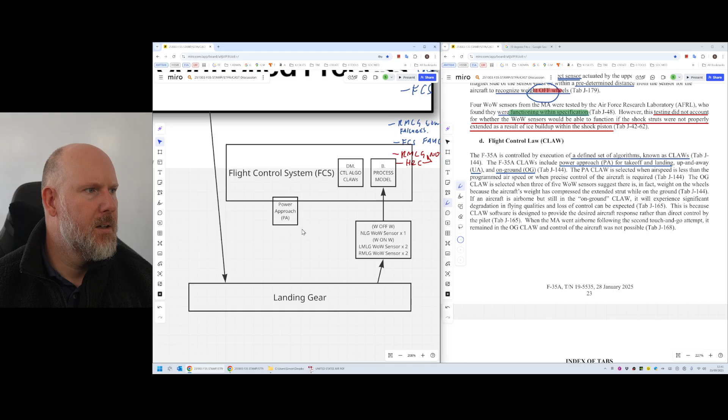So the F-35A CLAWs include power approach for takeoff and landing, up and away, and on ground - so there's three. Let's make that: power approach, I'll use an acronym, PA. What's the other one - up and away, which was UA. Can't spell, there we go. And the third one was on ground, OG. So that's three different control algorithms that we're talking about there.

So that's what they are there. I'm just going to leave them there. I'll tidy it up later on. I don't want to spend too much time doing that now.

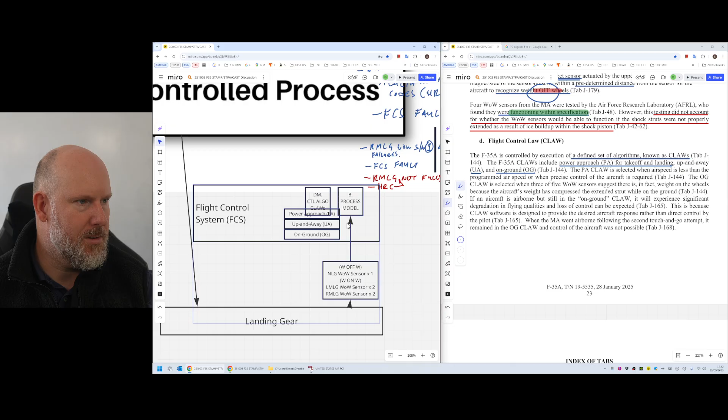Okay, so the PA claw, the power approach claw, is selected when airspeed is less than the programmed airspeed or when precise control of the aircraft is required. The OG, on-ground claw, is selected when 3 of 5 wow sensors suggest there is in fact weight on wheels, because the aircraft's weight has compressed the extended strut while on the ground. So that bit there is really important.

So we've got, out of this logic, use my pen, there we go. Is it that one? Yeah, this one. Let's just zoom in. So we've got, let's use red this time.

So this is saying that 3 out of 5 weight on wheels. So 3 out of 5 is weight on wheels. There we go, 3 out of 5 sensors, recognising that nose landing gear 1 indicates weight off wheels. So if it's going to indicate weight on wheels, that means that the nose landing gear should have compressed. So nose touchdown.

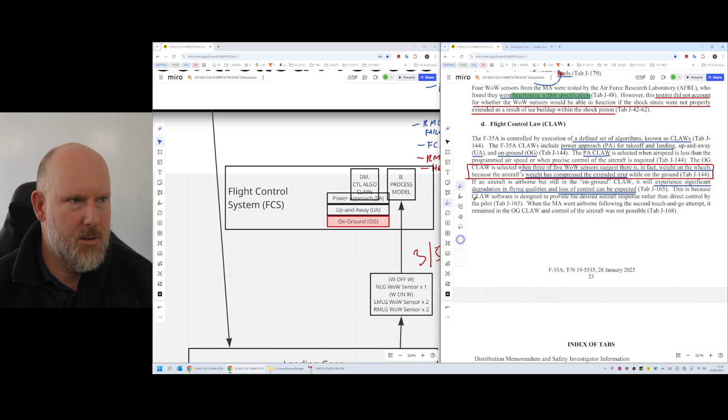This is because the claw software is designed to provide the desired aircraft response rather than direct control by the pilot. Okay.

So what we're saying here is we've got the flight controls. Yeah, you should be able to see that. So what we're saying here is this: the flight control system, if it is in ground mode, on ground claw, when it's actually in the air, the physical process is the aircraft is in the air, that can lead to controllability issues.

Whereas this is because the claw is designed to provide the desired aircraft response rather than direct control by the pilot. So if this, this diagram's, I need to update this diagram. It's not appropriate anymore. I need to put this.

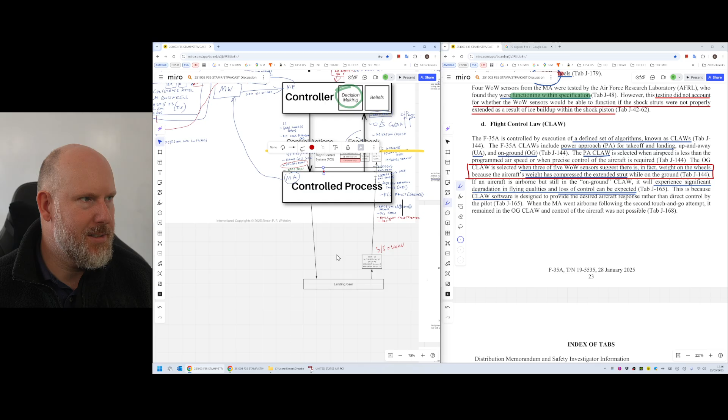They need to go there somewhere. That needs to touch the aircraft itself. So let's just name that mishap aircraft. Doesn't matter the detail, what type of aircraft it is at this stage. So let's just make that box represented there. Can you see that okay? Let me just make the text a bit bigger. There we go, mishap aircraft.

And then we'll connect flight control system to the aircraft, that one there. Then of course that can go on the bottom of there like that. Okay, so the WOW sensors, yeah, it looks a bit messy, that, doesn't it? I think that's a bit too messy. Let's just move. There

We go. This is what happens when you're doing these kind of analyses. It is an iterative process. So you have to, the more experience you get at building control structure models, you wouldn't make the mistake I've just made. I should have started with boxes on a diagram in the first place instead of trying to be clever about it.

Story of my life. No.

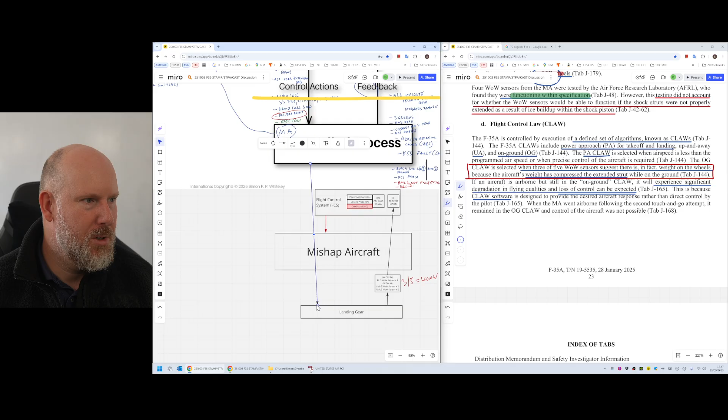There we go, 3 out of 5 weight on wheels, there we go. So the flight control system controls the aircraft, but the pilot also controls the aircraft. So you've got, there goes the pilot up there. So the pilot can provide control actions to the aircraft, but then the flight control system can also provide control actions to the aircraft. So potentially there is a conflict of control actions there going on.

But the control structure you've got there is implying that the pilots have direct control over the flight control surfaces, whereas it might not actually be the case. It may be that the pilot actually provides inputs to the FCS, and then the FCS decides what the control outputs are to the flying controls. So does that make sense? You can have two different architectures there, and it's important to recognize that.

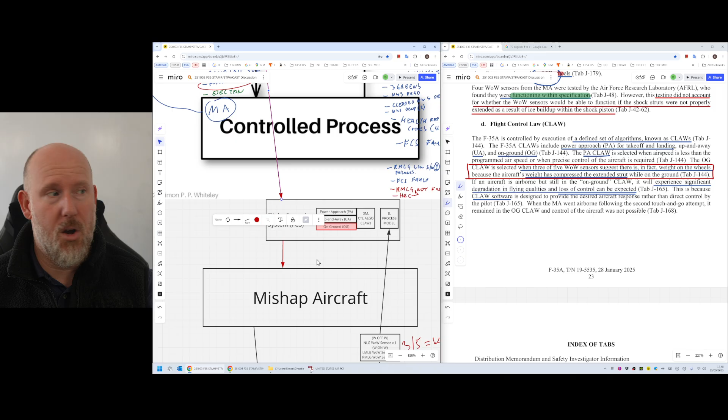And that's why this process is an iterative process, because when you're developing the control structure model, you might not know that that's the logic. You'll have the implied logic, which is this, but the actual architecture is it's a bit more complicated than that. Actually, the pilot's inputs don't go to the flying controls, they go via the FCS. There might be emergency or reversionary modes, I don't know, but it is an advanced jet, probably not.

Okay, so loss of control can be expected. This is because the claw software is designed to provide the desired aircraft response rather than direct control by the pilot. So yeah, that's...

I think we're getting to it now, everybody. I think this is where the issues lie. When the mishap aircraft went airborne following the second touch and go, it remained in the OG control law, and control of the aircraft was not possible.

So just to summarise, looking at the control structure model, you've got a number of things going on here. You've got the claws that decide whether the aircraft is in... actually, let me make that explicit - claw decision-making algorithm. It's actually 4 algorithms there. So there is an algorithm for deciding what control law to put the aircraft in, and then there is the actual algorithm itself, and what that capability means in terms of control actions of the flight control system.

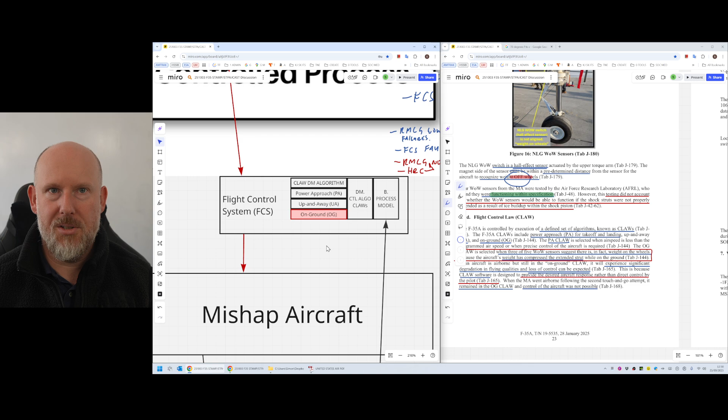So if the flight control system believes the aircraft is on the ground, then it's going to use those control actions. So however it is possible for the flight control system to believe it's on the ground when it's actually not, that is going to cause the same accident, the same uncontrollability and loss of aircraft. I'd argue that's systematic design - that is the design of the aircraft, apparently, according to this. So this feedback path, the weight on wheels, or the way we design the aircraft to decide whether it's in flight or on the ground, is critically important for this flight control system.

And I would wonder whether there is an override switch for the pilot to set - yes, I'm on the ground, or no, I'm in flight. I don't know if that's a feature. Probably not. But...

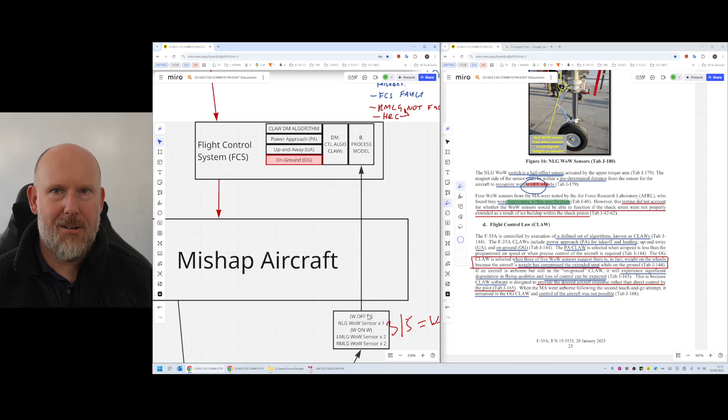Let's say you've got a landing gear failure. Maybe your landing gear's fallen off, or been shot off, or blown up, or something. You've got battle damage - how do you get the aircraft back to land on the ground? What happens if you get damage, a bird strike in flight or something like that, causes the aircraft to believe it's on the ground when it's not? As you saw, it was within a few seconds from the aircraft flying to out of control and crashing. So the pilot hasn't got much time to detect and respond to something such as that.

So this is not good, not good at all. So the flight control system brings together systems to provide control of various parts of the aircraft through the vehicle management computers and the electrohydrostatic actuators on each flight control surface.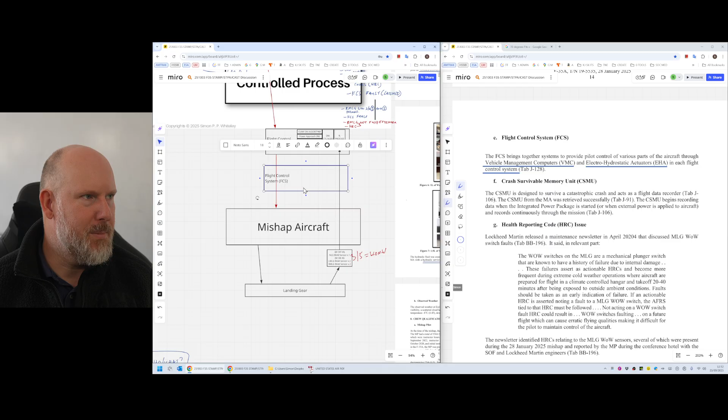So if we were to, let's just make the model a bit bigger. I'm probably adding too much detail now. I don't want to go too crazy - maybe it's a bit late for that. So bear with me a second. So we've got the vehicle management computers, VMC. I can't spell, there we go.

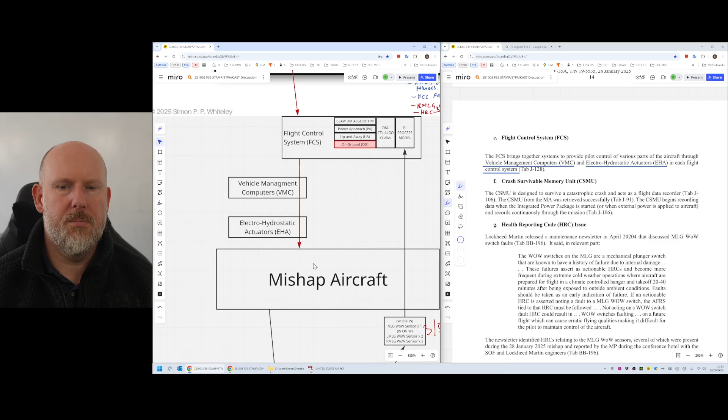Vehicle management computers, and we've also got the electro-hydrostatic actuators, EHA, in each control system. So there's probably multiples of these for the pitch, yaw, roll, and thrust, perhaps, I don't know. So I'll just chuck those in there. They are involved in those control actions in some shape or form. And the pilot is involved in that either through the flight control system or perhaps directly to the VMC or the EHA. I don't know if there's a reversionary mode, emergency mode, for example.

Okay, right, let's keep going. So crash survivable memory - that's really interesting. Is that all they've said about the flight control system? That's it. Surely there's more. No, apparently not. Okay.

Interesting, let's keep going, and we'll call it a break just before operations and supervision. We'll stop there because we've been going for quite a while, I think. What time is it? Nearly 1 o'clock, so nearly 2 hours, everybody. I'm hoping so far you're getting the idea that perhaps this investigation hasn't gone far enough into the flight control system and the design of the aircraft.

Why is it appropriate that we've got those kind of sensors that then cause the flight control system to decide it's on the ground when it's not, and then basically crash the aeroplane? That doesn't seem right to me, that. Anyway, let's carry on.

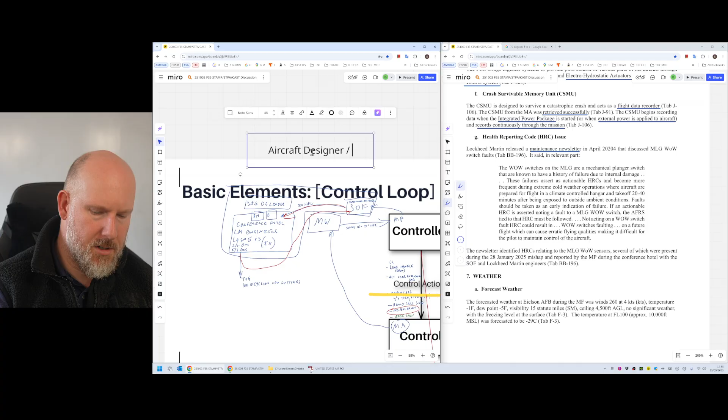So they provided a maintenance newsletter in April 2024 that discussed main landing gear WOW switch faults. Okay, so there's somebody there who knew about switch faults.

Let's... I hope you don't mind how scribbled it looks. It will look nicer than this next week, I promise.

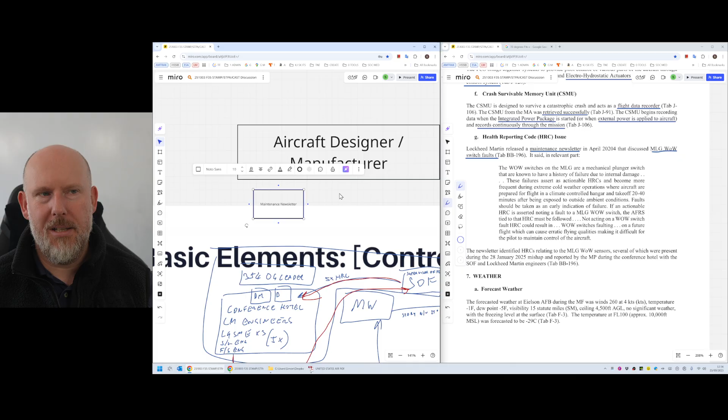Maintenance newsletter. Before I go into the detail of this bit, I just want to emphasise something from a CAST accident perspective. So you'll recall from what I said yesterday, CAST analysis has three broad parts, and they're not sequential. They could be sequential, but they're typically iterative. But as part of the structure analysis part, the third analysis element...

This part here, I mentioned the other day about this thing called a Safety Information System, SIS. Now, this looks like a really formal sort of system, and it could be, but it doesn't have to be. It could literally be somebody providing a maintenance newsletter: hey everybody, for awareness, this is what's going on, you might want to be aware. That is a way of making people aware of things, but if that is a safety piece of information, it should be communicated in a way that everybody who needs to know gets to see it, and they can acknowledge that they've read it, understood it, and taken appropriate action. So this is where we go from an informal to a formal safety management system, an informal to a formal safety information system.

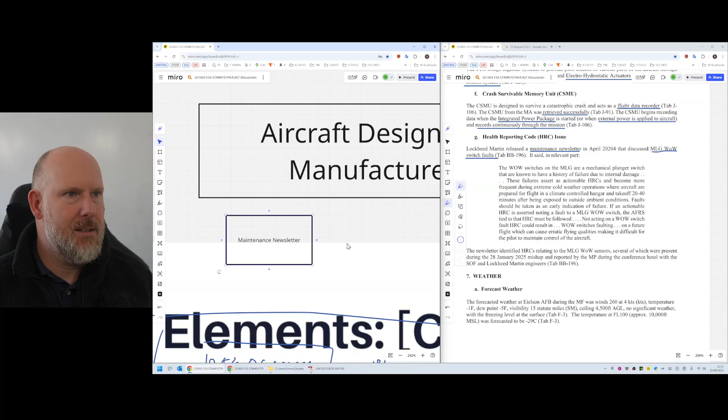So I'll just quickly jump back to that. So we're going back here. So they provide a maintenance newsletter. Let's have a look, let's take an arrow, let's have that one, copy, paste. So the aircraft manufacturer provides a newsletter in April 2024. So this was 10 months before the accident, 9 months, 8 months.

The WOW switches on the main landing gear are a mechanical plunger switch that are known to have a history of failure due to internal damage. These failures assert as actionable health reporting codes and become more frequent during extreme cold weather operations, where aircraft are prepared for flight in a climate control hangar and take off 20 to 40 minutes after being exposed to outside ambient conditions. Faults should be taken as early indication of landing gear failure.

If an actionable HRC is asserting, noting a fault to the main landing gear WOW switch, the AFRS tied to the HRC must be followed.

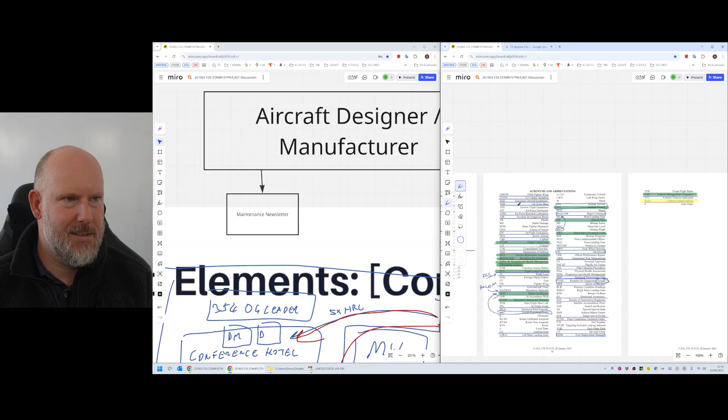So can everybody remember what AFRS is? I can't remember, I think we looked at it yesterday. Where's the acronym list? AFRS, it's not in there. How am I supposed to know what it means? Bloomin' heck, right, let's look at the report. What does it mean? Don't tell me it's only in there once. It's in there once. What's an AFRS? It's not the Air Force Recruiting Service. Gosh, what is it? Can anyone tell me in the chat what AFRS means? I thought we saw what it was earlier on, but obviously we didn't. There we go, AFRS tied. I don't know what that is. What is it? What is AFRS? I can't remember. Must be... I'm presuming it's some kind of procedure, maintenance procedure or something, immediate action. I don't know.

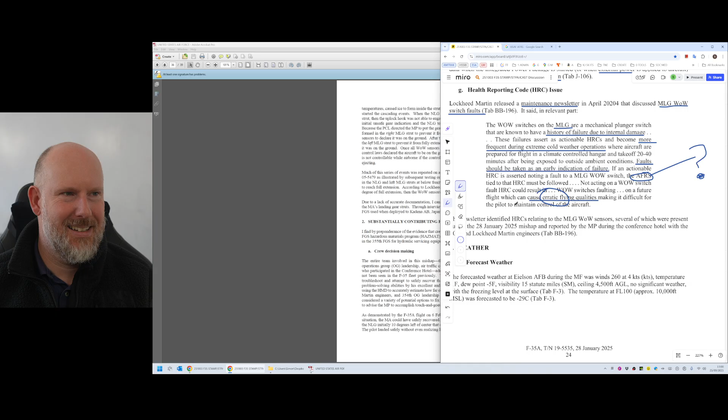Not acting on a WOW switch fault could result in WOW switches faulting on a future flight, which can cause erratic flying qualities. Erratic? I'm not being funny, but something as serious as that is really serious, because we've lost an aircraft.

The newsletter identified HRCs relating to the... sorry, I just need to highlight this because that's just a bit ridiculous, I think. So this is interesting because it suggests that the way the aircraft designer manufacturer manages these issues and tracks them, do they appreciate how serious it is? Do they recognise how serious it is? I'm sure that they do, but this doesn't seem to give me the confidence that they really understand the potential risk of losing aircraft due to these issues. And I suppose before the accident, with hindsight bias, they wouldn't have known that having issues with ice could contribute to this.

Oh, we've got some people in the chat. Oh, Andrew, hi Andrew, great to see you. Thanks for coming along. What's Andrew saying? So Google suggests the Spotlight tool used for AFRS provides off-board troubleshooting for F35 maintainers, capture maintenance knowledge and shares it across. Oh wow, anomaly and fault resolution system. Oh Andrew, fantastic, you can come again. Thank you for that.

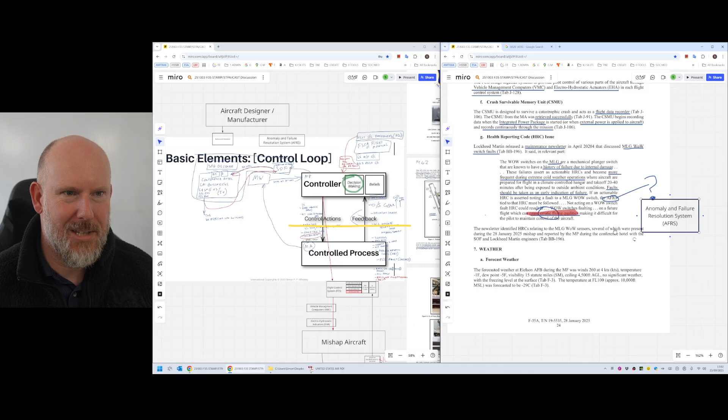So there's this thing called an AFRS that somebody needs to use. I think we need a bit more clarity on what that is and how it fits into this, like I was saying earlier about information systems. Sorry, I'm drawing stuff and you can't see it. I've just added this here, and then added it in there just to stick it in the control structure, because I think it's important from a broader safety management perspective. It's an important feedback path.

What was I saying? So the newsletter identified HRCs. Oh, I can't remember what HRC is. Blooming heck. And it's missing from... HRC, what does it say in the report? Everybody, HRC, health reporting code, that's it. Health reporting code issue, there we go. I'm sure there's an easier way to do this. Deploy, duplicate, sorry, health reporting issue, okay.

Must be followed. Not acting on a WOW switch fault could result in WOW switches faulting on a future flight, which can cause erratic flying qualities, making it difficult for the pilot to maintain control of the aircraft. That statement really underplays the significance of things.

Like I mentioned, is that because the people involved didn't realise the severity of the outcome, or because - and I'm not trying to point fingers here, I'm just trying to play both sides of the argument, devil's advocate - did they play down the potential implications of it for whatever reason? I'm not accusing anybody, I'm just exploring ideas. That's the purpose of this: being open, honest, trying to be as humble as possible, and thinking about all possible scenarios without assigning any kind of blame or guilt.

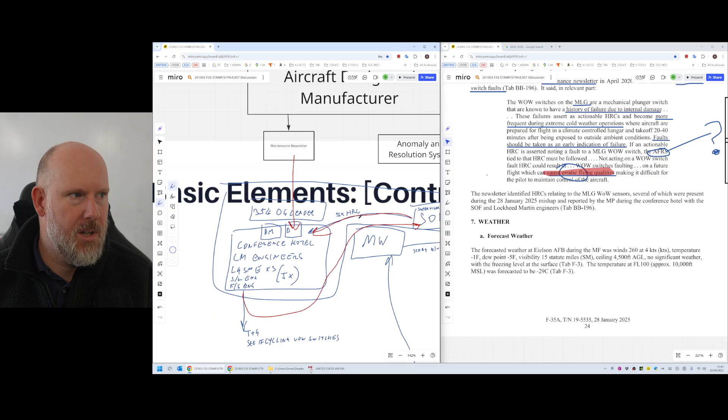Interesting, so you'll remember this from yesterday, this was the conference hotel people. So I would like to assume, and I don't know this to be true because it doesn't say yet, that this information was in their knowledge, so they knew about it, so that they could make decisions, because they were told about the 5 HRCs, the health reporting codes. So were they aware of this information? I don't know, we don't know.

Fantastic, weather. Okay, weather. It was... let's have a look. Winds 4 knots, temperature -1. What did we say -1 was earlier on? I can't remember, it was cold. It's bloody cold, -17, there we go. -17. Well, it's even colder than that because it's 0 there.

So -17, sorry, -1. -5, visibility 15 miles, ceiling 4.5K, no significant weather with freezing level at the surface, temperature at flight level 10,000 was -29. Oh, that is a bit chilly. It's interesting they put F and then C there. Yeah, I don't know why that is.

Okay, so we are nearly at a good point to stop. So what time is it? 1:05. Should we keep pushing to there?

Yeah, let's do it. Observed weather at Eielson Air Force Base at 21:55 Zulu was reported to be 3 knots, 10 miles, scattered light cloud, broken at 5, temperature -7. Oh right, so just an observation then. I mentioned earlier on that if the weather was different, if it was IMC conditions, this could have been a lot worse than it actually was, just because of the change in context.

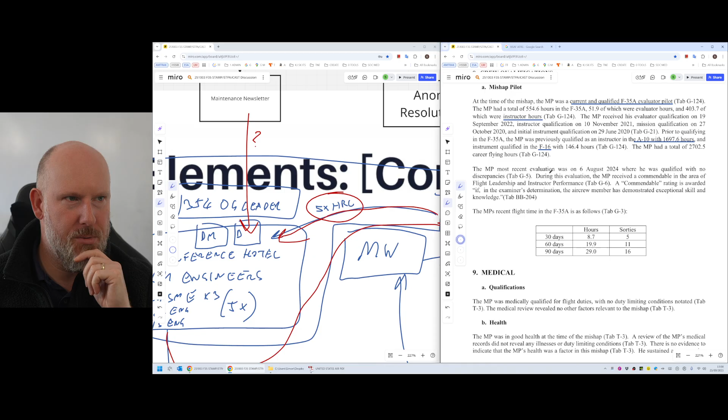The MP had a total of 2,700 career flying hours. The mishap pilot's most recent evaluation was in August 24, where he was qualified with no discrepancies. During this evaluation, he received a commendable rating in flight leadership and instructor performance. A commendable rating is awarded if the examiner determines the aircrew member demonstrated exceptional skill and knowledge. So he couldn't have had a better pilot pretty much in the cockpit at the time.

Brilliant, so these are the hours. Medical: qualified for medical flight duties, medically qualified, no duty limitations. Medical review: no other factors relevant to the mishap, in good health. Review of the medical records did not reveal any illnesses or duty limitations. There's no evidence to indicate the MP's health was a factor in the mishap.

He sustained a compression fracture of the thoracic spine and superficial abrasions to the neck and face as a result of the mishap. I hope Martin Baker get him a Breitling watch as compensation.

Pathology: toxicology samples were obtained and submitted to the Armed Forces Medical Examiner System for analysis, for all relevant parties, so that includes maintainers presumably. Negative results for drugs of abuse panel, ethanol, methanol, isopropanol, and acetone.

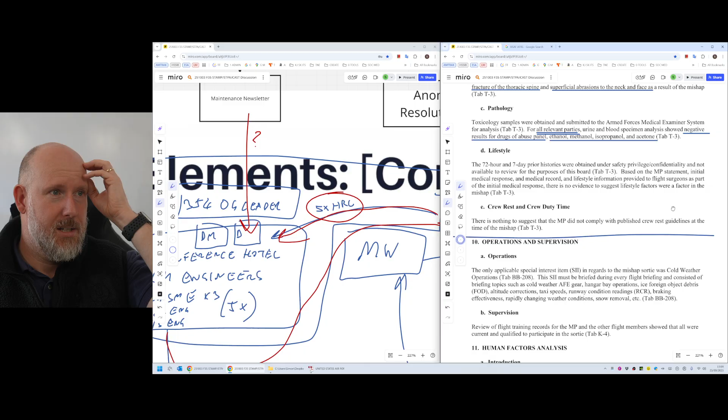Lifestyle: the 72-hour and 7-day histories were obtained under safety privilege confidentiality and not available to review for purposes of this board. Based on the mishap pilot statement, initial medical response, medical record, and lifestyle information provided to flight surgeons as part of the initial medical response, there is no evidence to suggest lifestyle factors were a factor in the mishap. Crew rest and crew duty time: there is nothing to suggest that the mishap pilot did not comply with published crew rest guidelines at the time of the mishap.

Okay, great, so I think that's a good time to pause there. There are other sections we're going to go through, probably tomorrow, maybe later today if I get some energy back. One thing I want to observe is that the style and structure of this investigation report is very much about the operator of the aircraft, the direct controller of the aircraft. In this case I've got two control structures preliminary at the moment: one about the operation of the aircraft, and one about the maintenance of the aircraft and the hydraulic fluid and the supply chain associated with it.

This investigation report, up to this point, has been very much about the pilot, as you would expect. But what about the people involved in the maintenance? What about the people involved in the management of that maintenance? Why is that stuff not discussed? Again, it's probably because this is a standard format template for this kind of investigation. But if we're going to use CAST or STPA in the future, we have to be thinking more broadly than that. Who else, what else is involved? How do those controllers contribute or not?